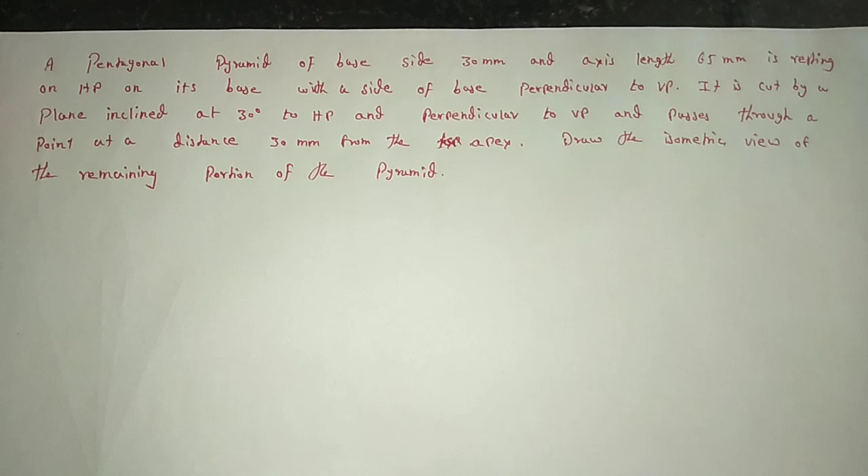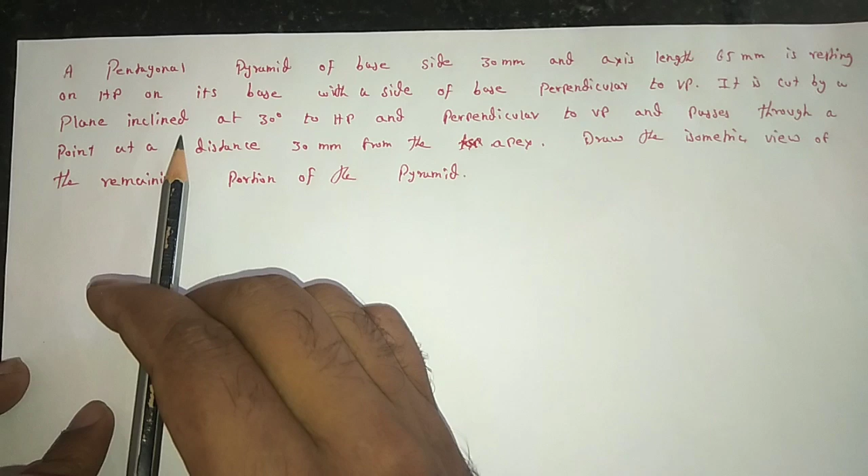In this video we are going to see one problem from isometric view. The problem is: a pentagonal pyramid of base side 30 mm and axis length 65 mm is resting on the horizontal plane on its base with the side of base perpendicular to VP. It is cut by a plane inclined at 30 degrees to HP and perpendicular to VP and passes through a point at a distance 30 mm from the apex. Draw the isometric view of the remaining portion of the pyramid.

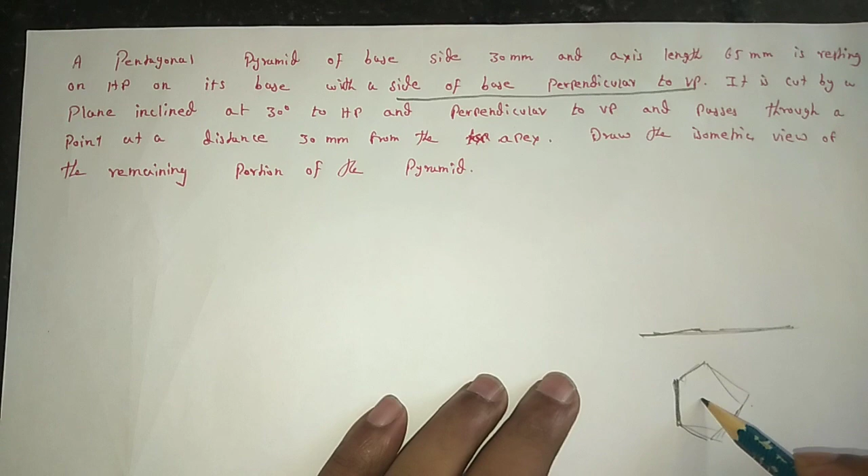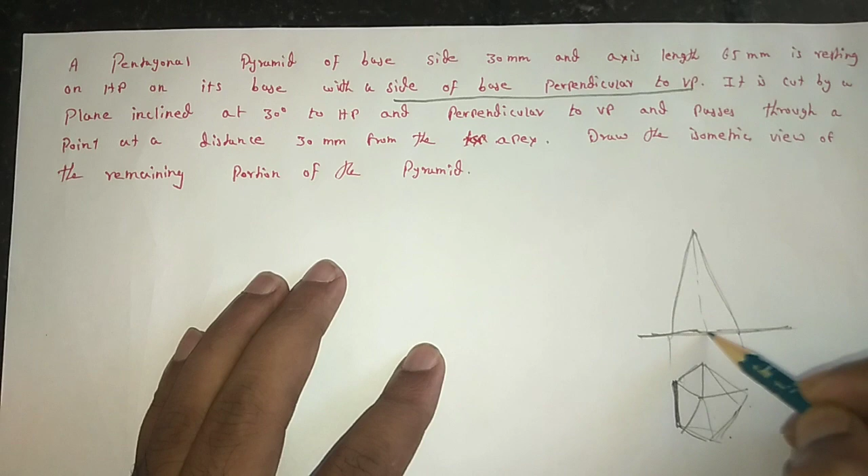Draw the pentagonal pyramid like this. See, in the center it is having the axis, and next it is cut by a plane inclined at 30 degrees.

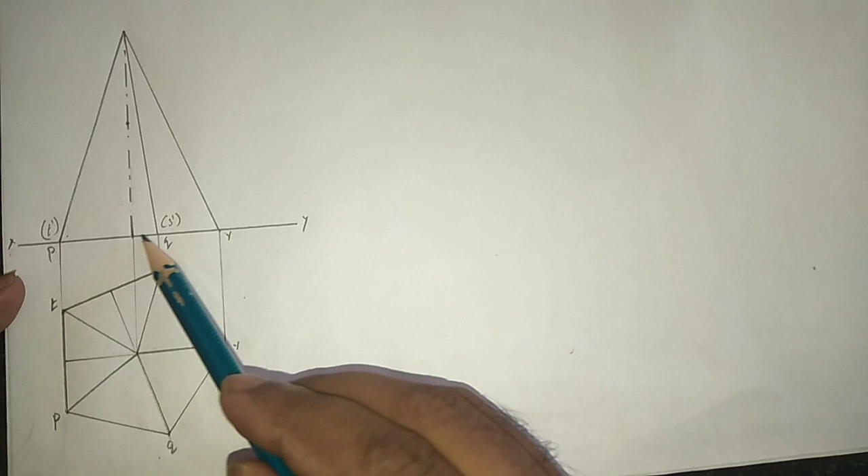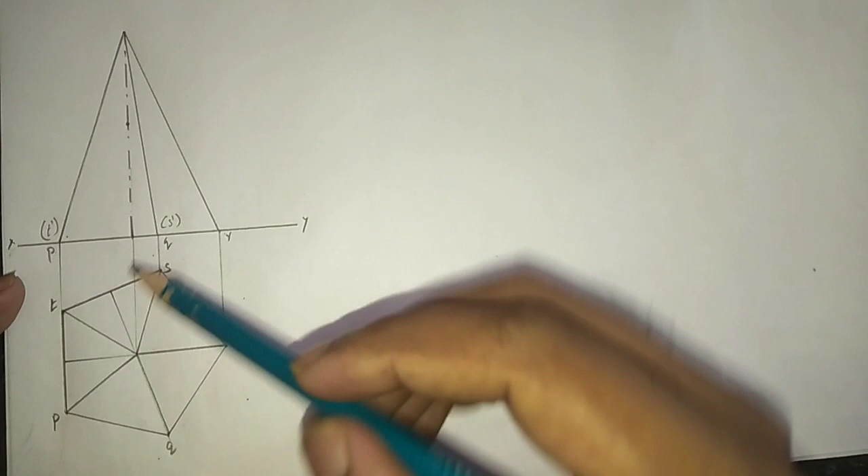Here P, Q, R: these points P, Q, R are visible and S and T are invisible.

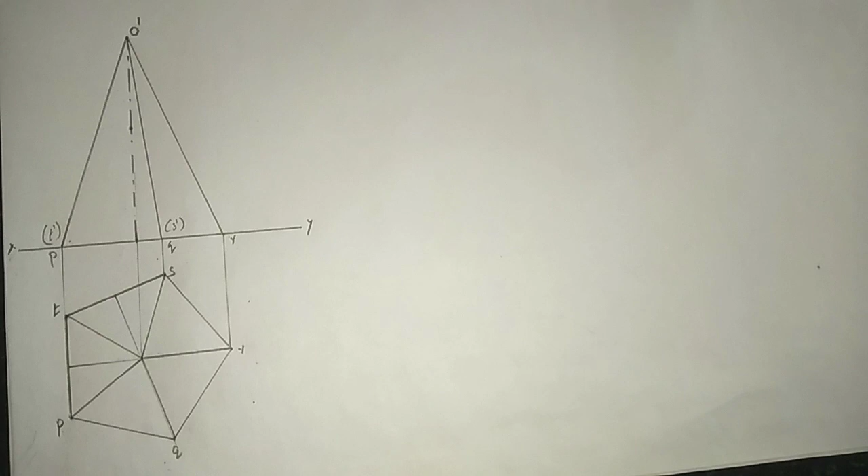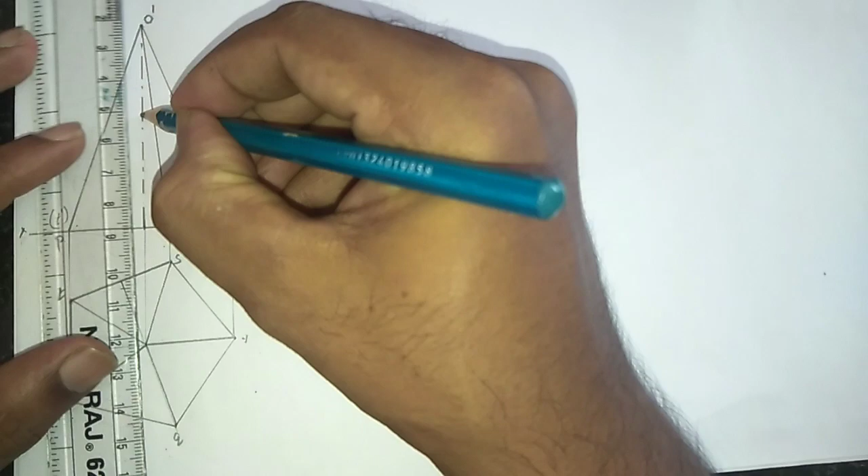So to cut, we place a protractor at the point at a distance of 30 mm from the apex point. So mark 30 mm from the apex; this is the apex point. So from this point I mark 30 mm distance. So this is the 30 mm distance point. In this point I place the protractor and take an angle of 30 degrees. So mark 30 degrees.

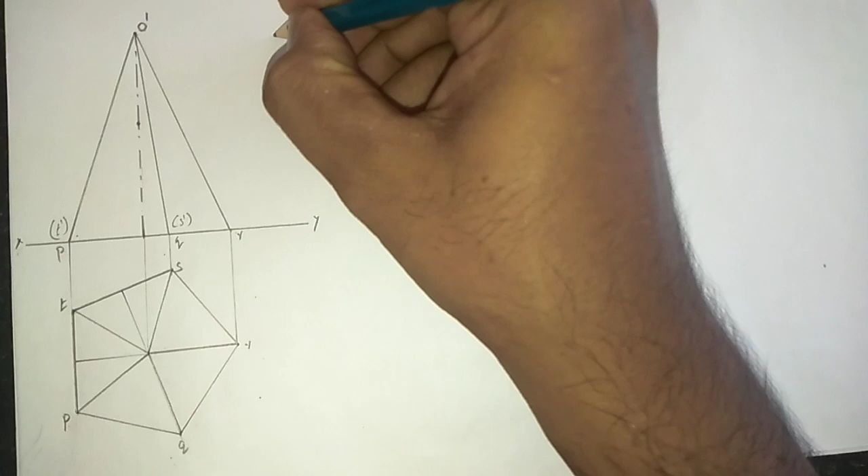Inclined to the horizontal plane and perpendicular to VP is not a problem. So place the scale and draw the line, the section line. So this is the sectioning plane line, and here we mention the line name is VT, and here the angle of the section plane is 30 degrees. This angle is 30 degrees. And now I am going to give the names on these

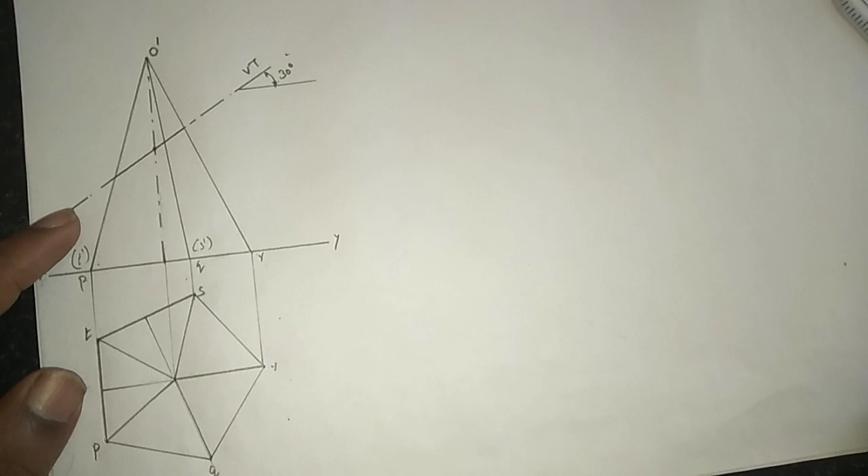points. So here, at this point, the cutting plane cuts the slanting edge. So this one is visible, PO. First PO is visible, so here I give the name A dash. At the axis we can neglect; here there are no slanting edges, and here one slanting edge is there. This is O and Q, a visible slanting edge. Here I give the name B dash, and another visible slanting edge is O and R. This is

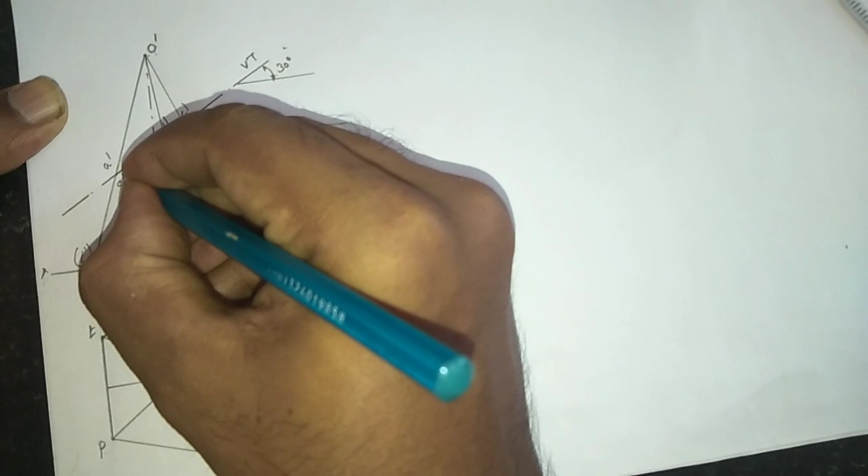So now we are going to draw the 3D view of this object.

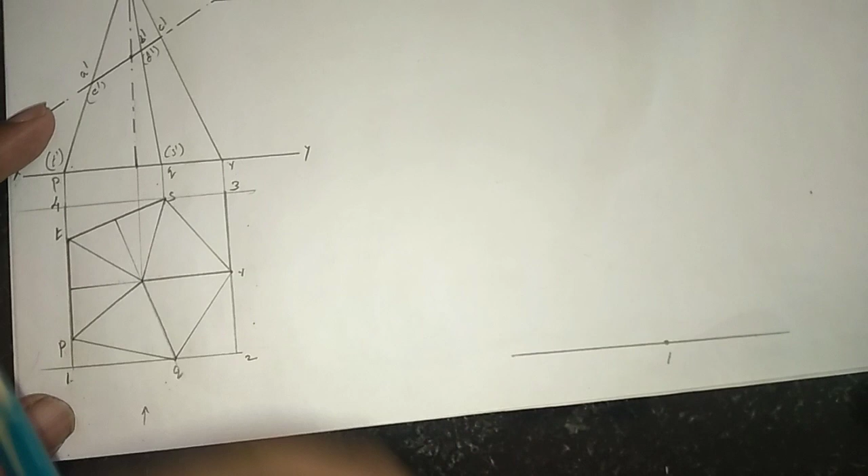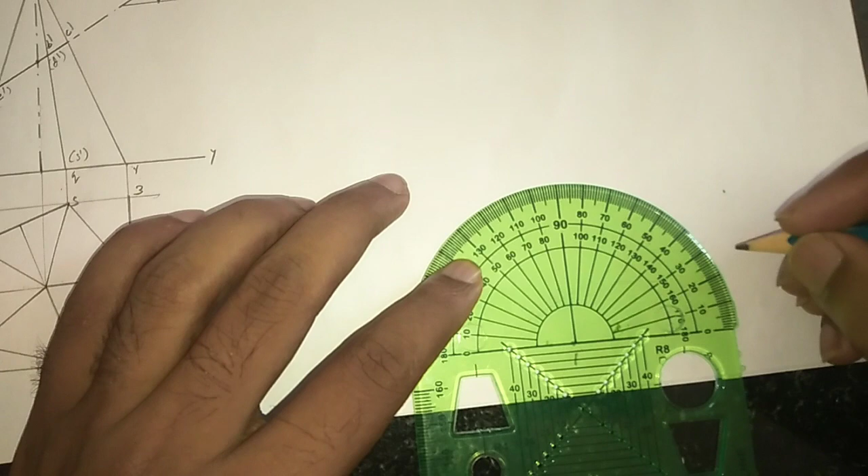So 1, 2, 3 and 4. Next draw one straight line and mark one point. This is point number 1, and from this point place the protractor and take an angle of 30 degrees on both sides. Here 30 degrees and this side 30 degrees, and next connect this point with this line, and now measure the distance between 1 and 4.

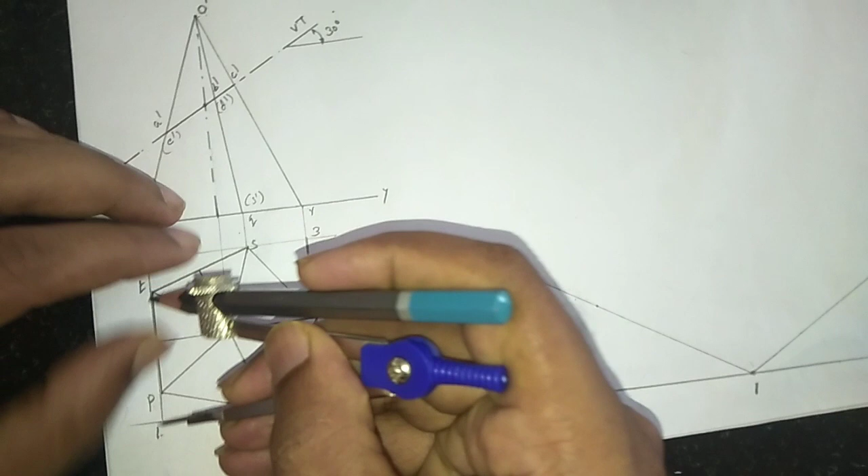And place the compass at point 1 and mark the distance 4, and measure distance 1 and 2. Place the compass here and mark the distance 2. So this is point number 4, this is point number 2.

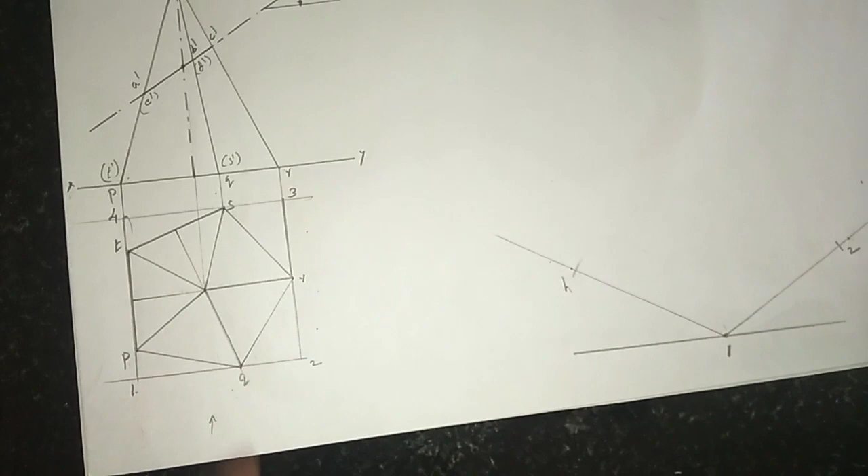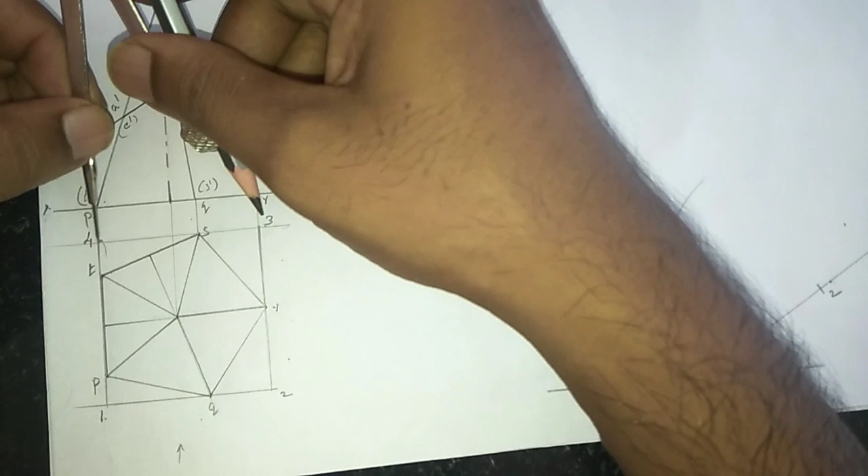Let's measure distance 2 and 3, and place the compass at point 2 and make the arc, and measure distance 4 and 3, place the compass at point 4 and make the arc. So this is point number 3. Now we need to connect point number 3 and 4, and 2 and 3.

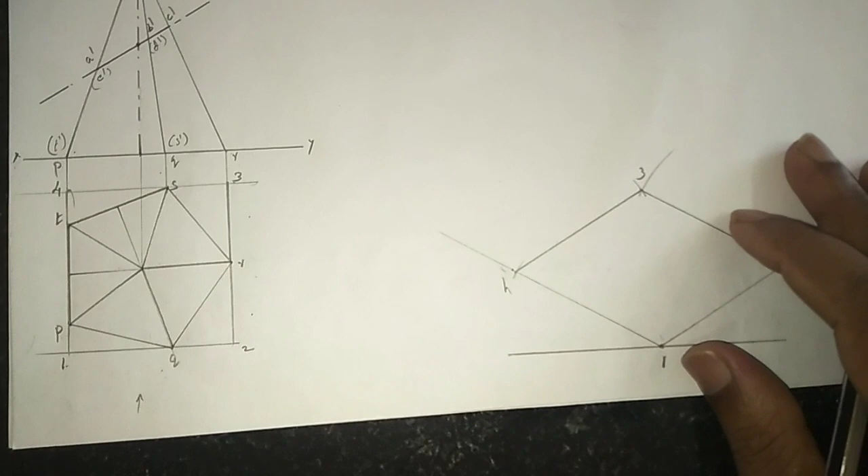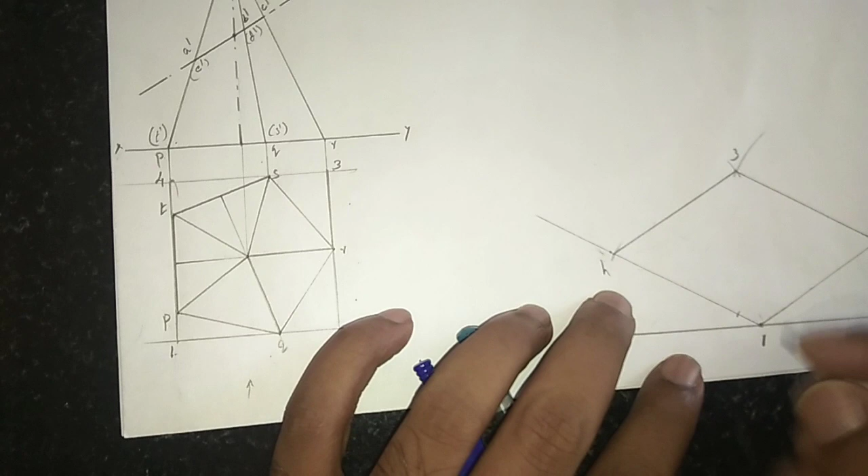Now the base portion of the pentagon we are going to mark at the point 1 and 4. Point P and T is there. So measure the distance of 1 and P and place the compass at point 1 and mark in the line 1 and 4 line. So this is point P.

And next measure distance 1 and T on the top view and place the compass at point 1, and on the line 1 and 4 we mark the point T. So this is point T. And next measure distance 1 and Q. Q is on the line 1 and 2. Measure distance 1 and Q, place the compass at 1 and mark Q here. So this is point Q.

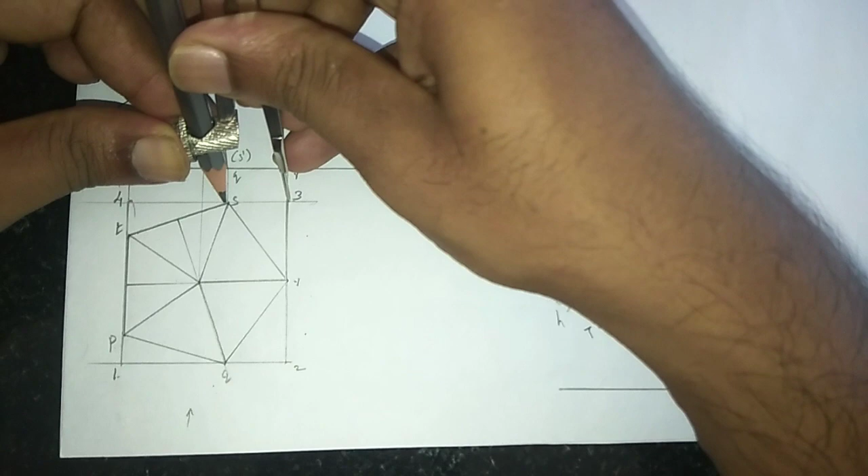And R is located on the line 2 and 3. Measure distance 2 and R. On the line 2 and 3 mark the R value. And S is located on the line 3 and 4. Measure distance 3 and S. So place the compass at point 3. On the line 3 and 4 mark the point S.

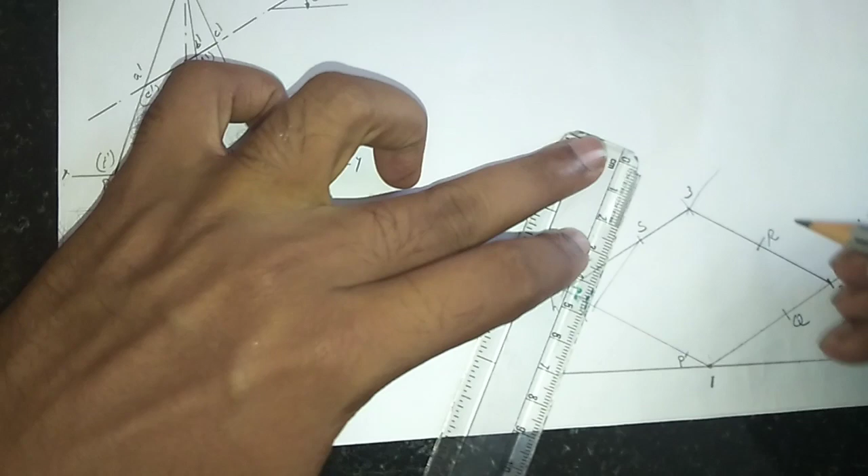Now the base portion of the pentagon pyramid we are going to draw. So P and S. First you draw a very light line. Q and R we need to connect. Very light line you draw.

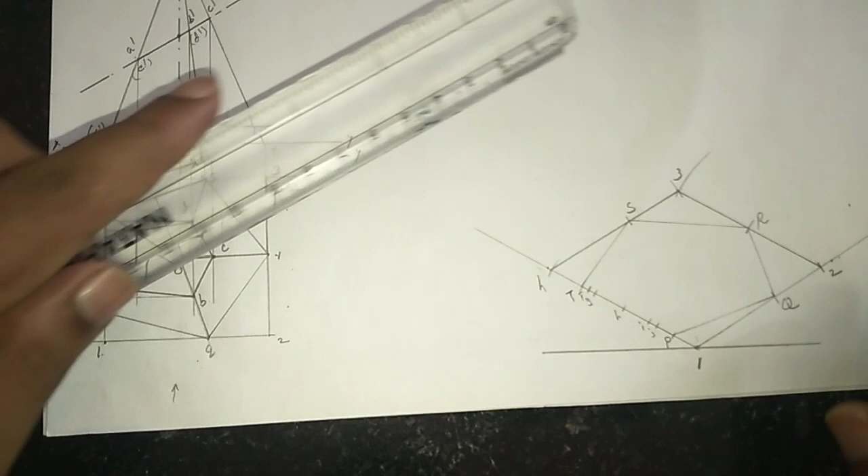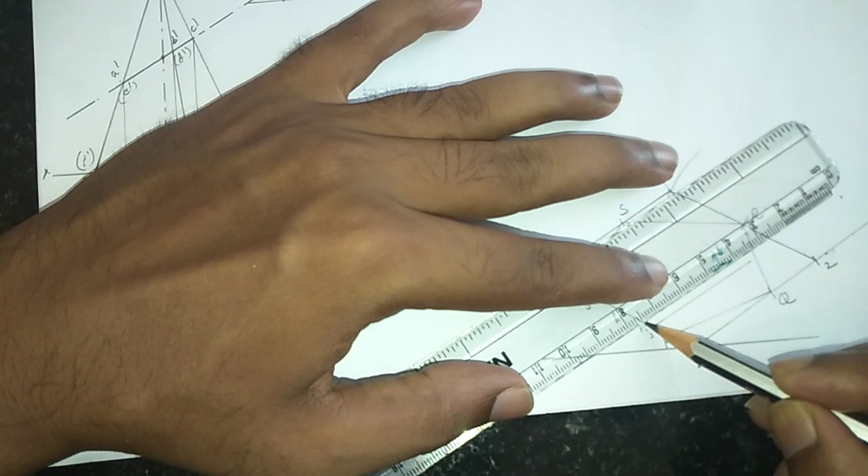From H also I am going to draw one parallel line. So like from G draw one parallel line, and from F also draw one parallel line.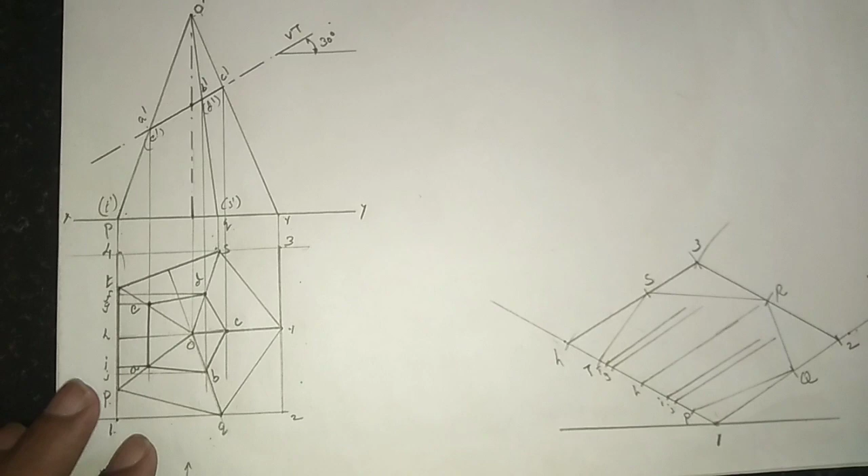Now we are going to measure the distance of the line I and A. With the help of the compass, measure the distance I and A, and on the I line, I mark the point for A. So this is a point for A. Next, measure the distance G and E, and on the line G I mark the point E. So this is point E.

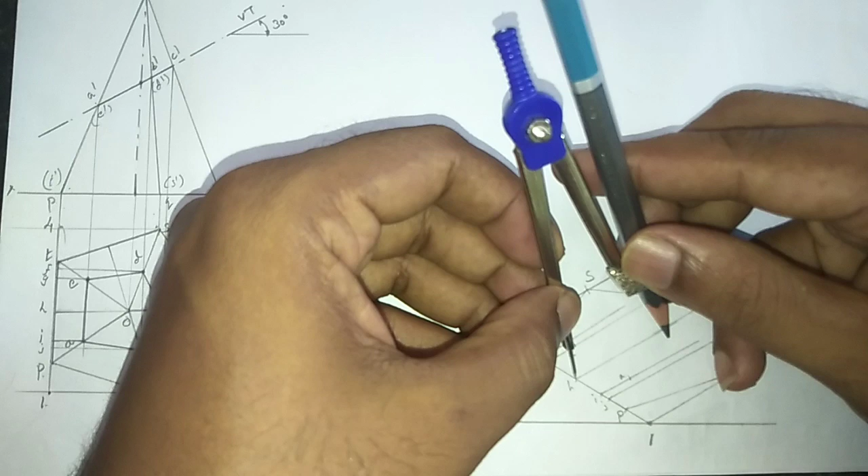Next, measure the distance of H and C in the top view, and here on the H line I'm going to mark the point. So this point is C. Next, measure the distance F and D, and on the F line I mark the point D. Next, measure the distance J and B, place the compass on the J point and mark the distance of B.

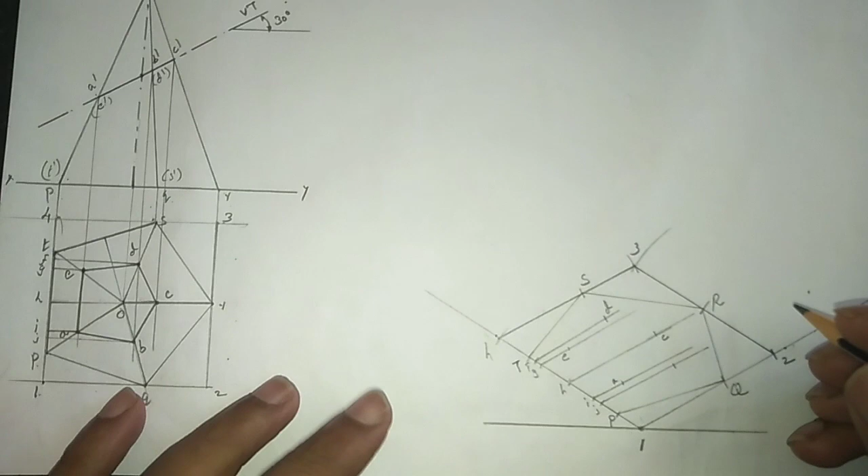Now from all these points A, B, C, D, E we need to draw perpendicular lines. So from E, I'm going to draw one perpendicular line, from D one perpendicular line, from C one perpendicular line, from B one perpendicular line, and from A one perpendicular line.

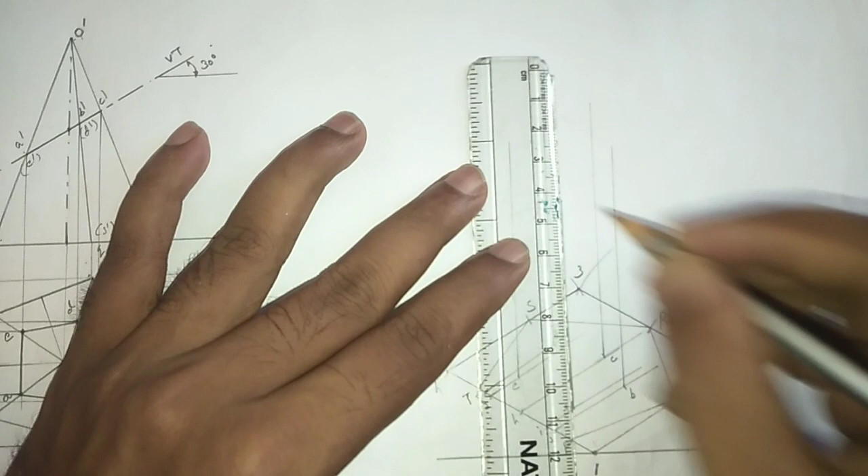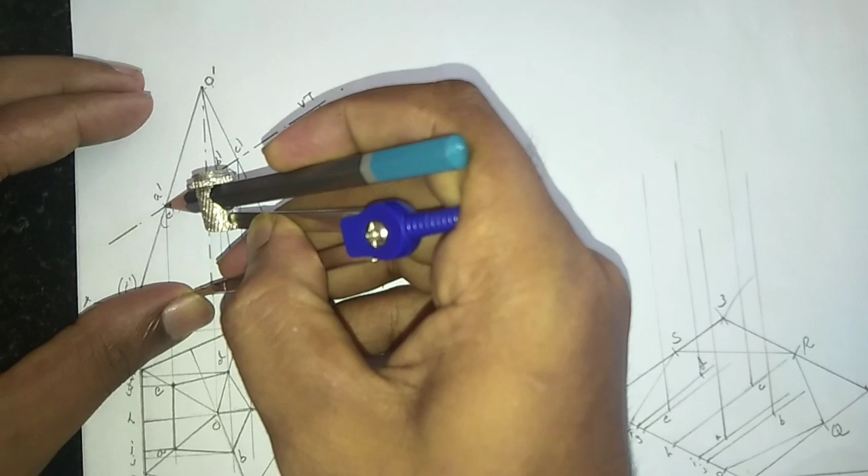Now measure the distance from this reference line, this baseline, to the first cutting plane point A, place the compass on the A line and mark here. This point is for the top portion of A. Let's measure the distance of this base and E, place the compass on the E line and mark here. So this is the place for the top portion of E.

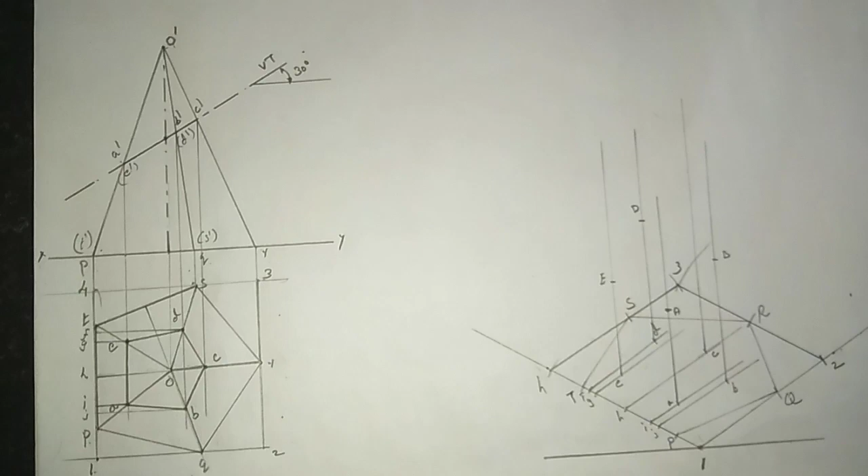Let's measure the distance of this baseline to B and D. Place the compass on the B line and mark here. This is for B. Place the compass on the D line; this is the place for D. So this is B and this one is D. Measure the distance of this baseline to the cutting point C, place the compass on the C point and mark here. So this is the point for C.

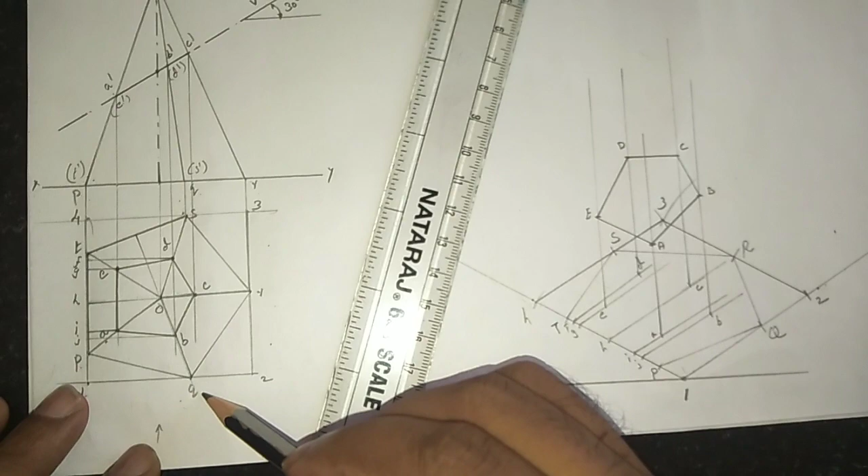Now we are going to connect all the points on the top portion of the pentagonal pyramid: EA, AB, BC and CD. Like this we need to connect. Now we are going to connect all the slanting edges. Here the slanting edges are P and A, B and Q, C and R, D and S, E and T. So connect all the slanting edges.

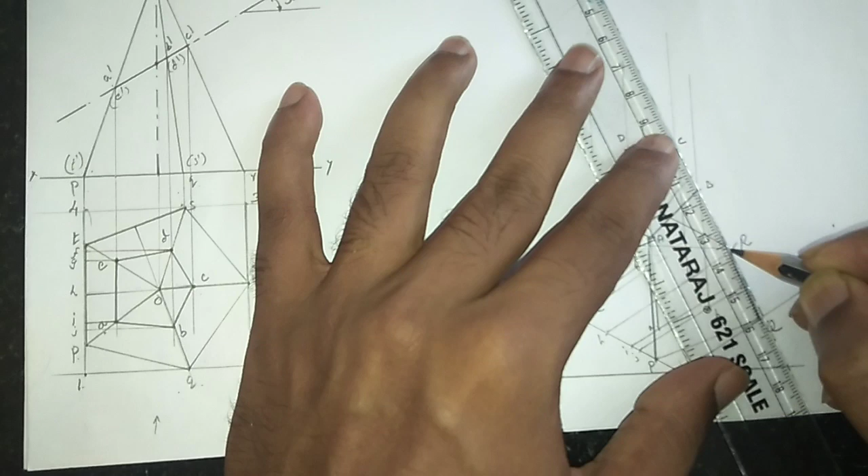So here P and A, next B and Q. Next connect C and R. Let's connect D and S. This is invisible, so draw a dotted line. And let's connect E and T.

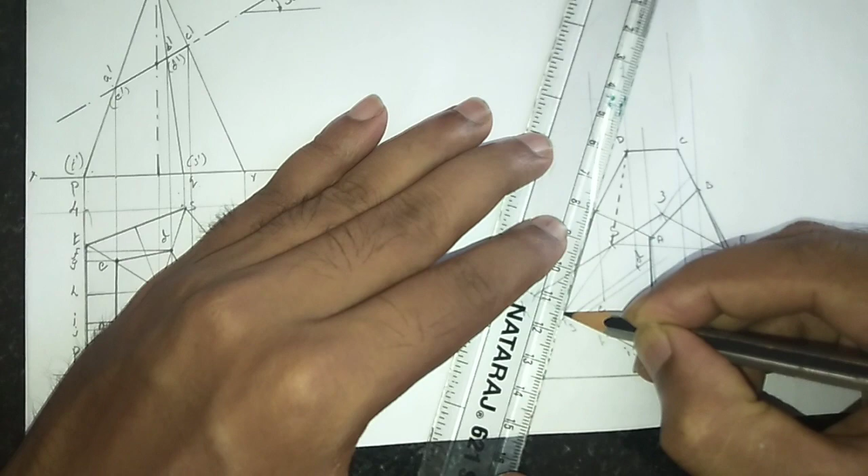The base line T and S is invisible, so draw a dotted line. And here also R and S is an invisible line, so make a dotted line.

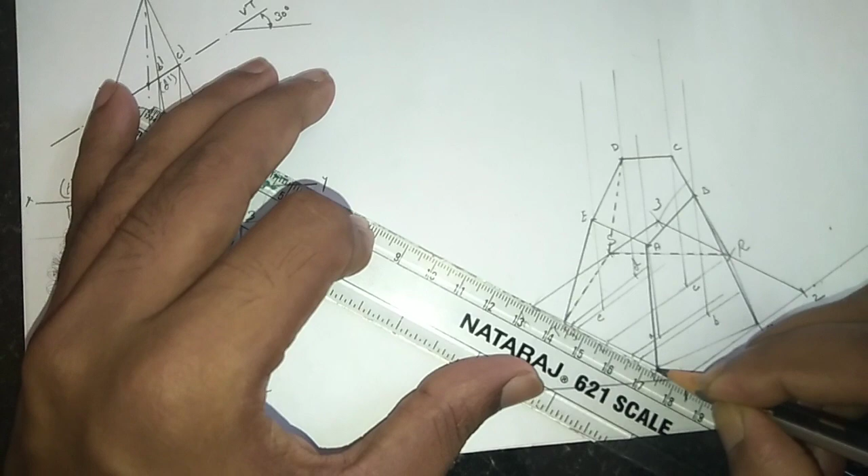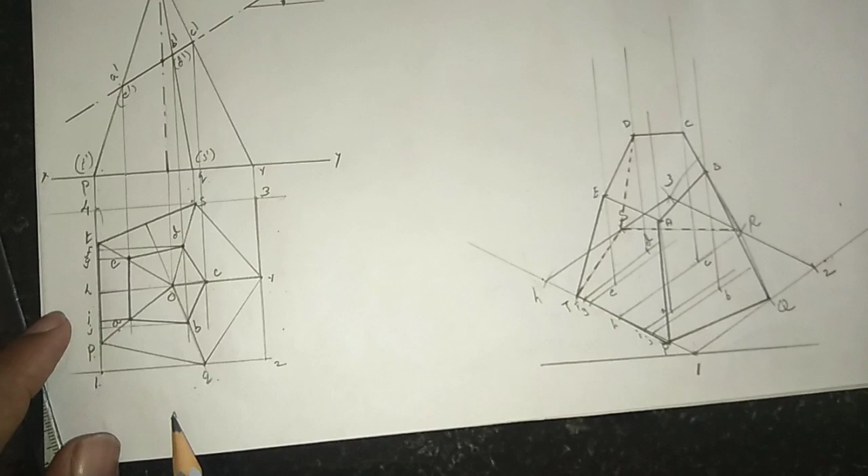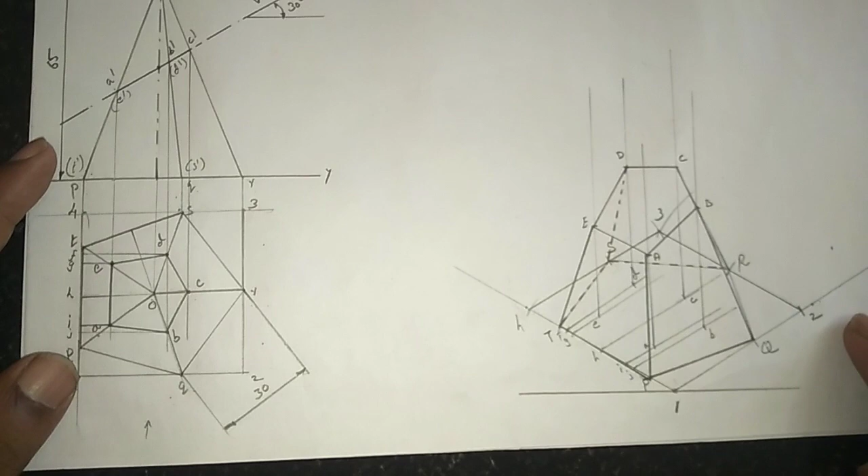Pentagonal pyramid, the truncated portion of the pentagonal pyramid. Finally we need to mention the dimensions: here the side value, and here the height of the pyramid, and at the bottom, all dimensions are in mm, scale 1:1. On top of this diagram we write isometric view, and on top of this one we write orthographic view. Here also we mention the angle. The angle is 30 degrees.

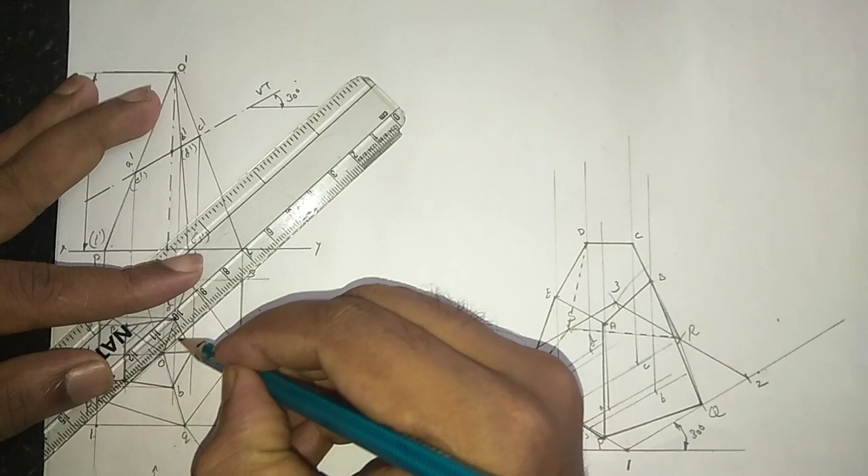The angle is approximately 45 degrees. So in this way we need to show the cut portion on the object. Here in this 3D diagram also we need to show the hatching line.